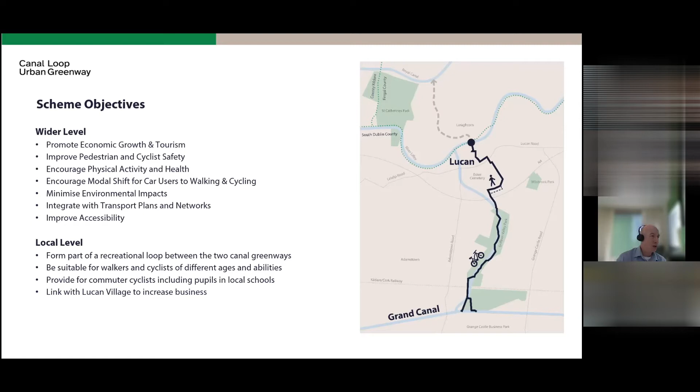And to also, that would be suitable for walkers and cyclists of different ages and abilities, to provide for commuter cyclists, including pupils in local schools, and as Rory will go into later, this route seeks to serve about 20 schools as it is emerging at the moment, and to also link with Lucan Village to increase business.

Traffic congestion in the county grew by 11% on main roads in 2016, based on annual figures taken at 13 locations within the county. Combined with population growth, traffic congestion is predicted to continue to grow. The population of South Dublin itself is predicted to grow by about 50,000 people by 2030.

Within that context, research has shown that cycling is considered to be a credible alternative to the car for short and medium length journeys. There are associated benefits identified for that in terms of reducing traffic congestion long term, reducing carbon emissions, promoting healthier lifestyles in the short term, and promoting economic benefits to local business in the short to medium term.

In terms of how the county and the area is doing in numbers of people cycling, the target is 10% for the cycle mode share under the National Cycle Policy Framework, in terms of the number of people commuting to school and work. The target is for 10% of people to cycle. To show how the county is doing, the percentage of people cycling on a regular basis in the county accounts for about 3.8% of the transport mode share.

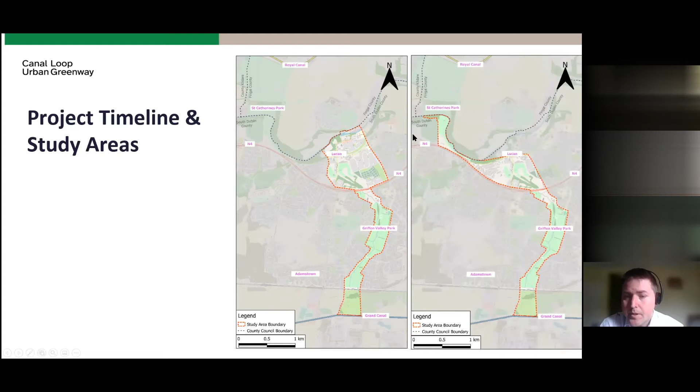Following the completion of this route selection, a second study was done to investigate options further west, which used the existing pedestrian bridge to link Lucan Demesne to St. Catherine's Park. This was known as Study Area 2. Finally, a comparison exercise was done to determine the optimum route from either of these study areas, which would best meet the scheme objectives.

In Study Area 1, there were 30 route options considered. In Study Area 2, there were a further 9.

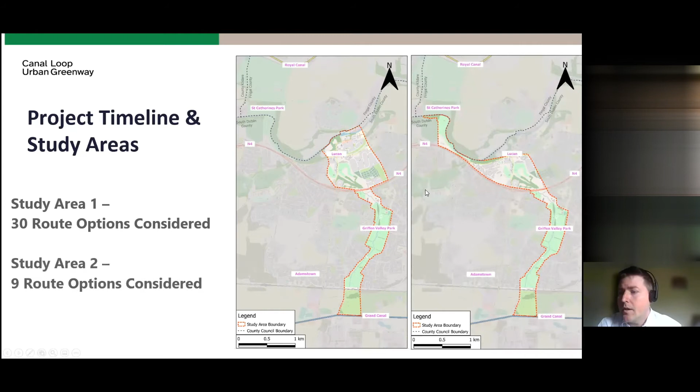So the methodology for how this was done: all possible route options within each study area were explored and concept designs were prepared for each one. The route options were then assessed against one another on the following themes: cost, and quality of service for cyclists, which was split into comfort, safety, directness, coherence, and attractiveness.

The route was designed with cyclists of all abilities in mind, so that they could be used by beginners as well as experienced cyclists.

The routes were also assessed on integration — this is integration with wider traffic plans, the walking and cycling network, any impacts on the traffic network, and on the public transport network.

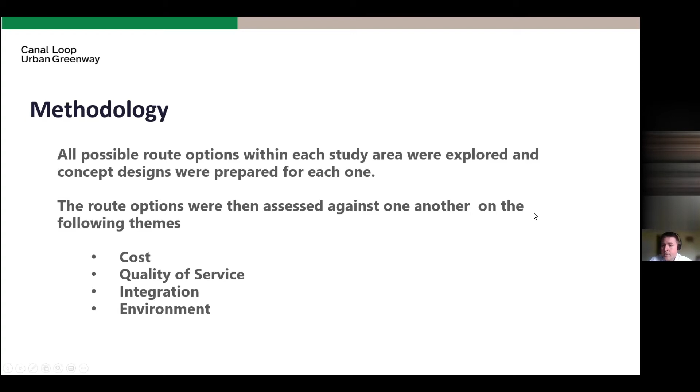They're assessed for impacts on the environment, for their viability from a planning perspective, and for tourism potential. So no route was chosen based on any one thing—it was a combination of all of these which ultimately drove the options assessment.

The design guidance and standards used for this project were the Design Manual for Urban Roads and Streets, the National Cycle Manual, the Greater Dublin Area Cycle Network Plan, and the Rural Cycleway Design. The assessment was done in accordance with the Common Appraisal Framework for Transport Projects and the Public Spending Code.

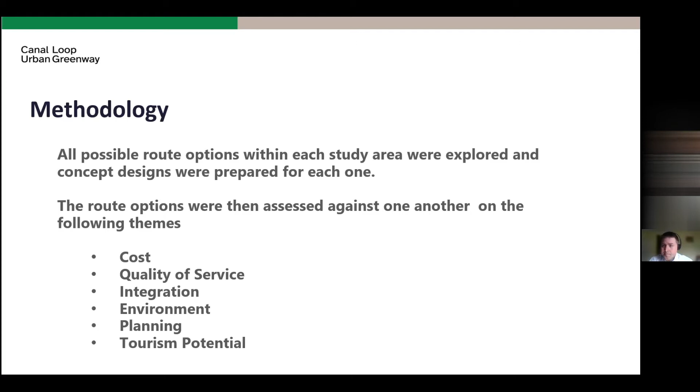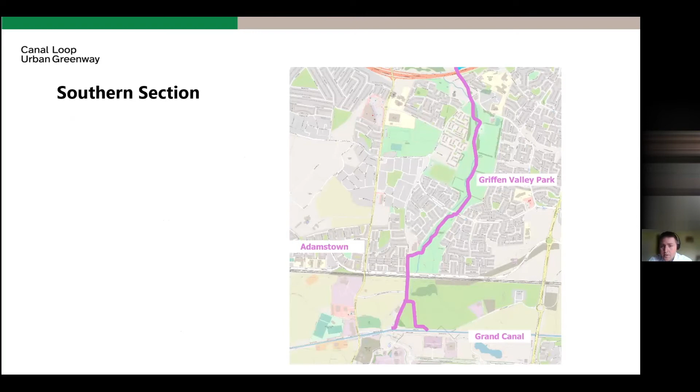The study area was split up into sections so that route selection could be done for each section separately. Here we'll look at the southern section first. The southern end of this section is at the 12th lock of the Grand Canal, and the northern end is at the existing footbridge over the N4 Lucan bypass.

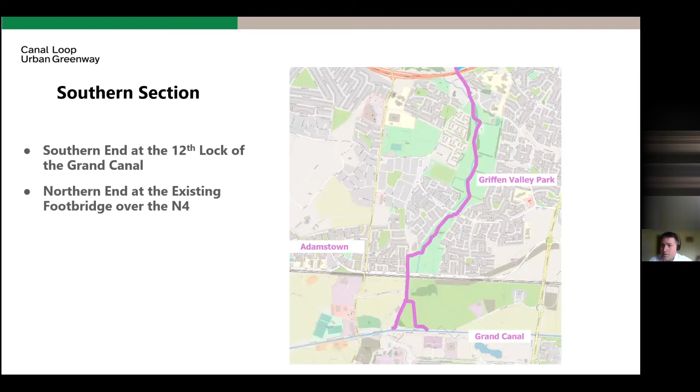This section is made up mostly of Griffen Valley Park, which runs north to south, and this section is common to both study areas—study area 1 and study area 2.

The option selection process in this section was relatively straightforward. Two options were considered, one on either side of the Griffen River.

Ultimately, the eastern side was preferred as it used the existing wider paths that already have public lighting in place. Most of the park is on this side of the river, so it will be more pleasant to cycle on and will have better connectivity to the amenities within the park.

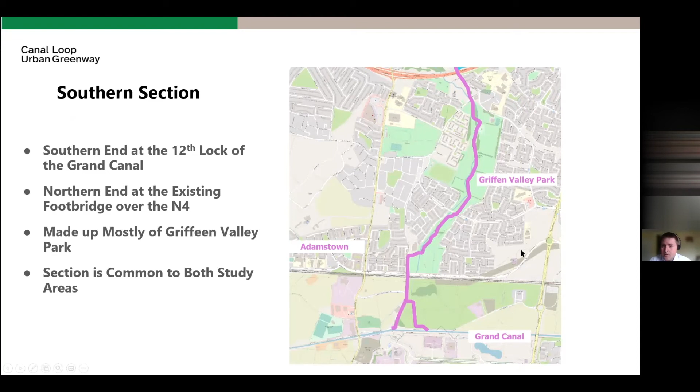These photos just show some of the existing facilities within Griffen Valley Park.

We'll move on to the northern section of the route now, for study area 1. It crosses at the same existing footbridge over the N4 Lucan bypass, and the northern end of this section is at or near the Liffey Bridge in Lucan.

It contains the Lucan village area and a network of suburban roads and streets. There are steep slopes in this section down towards the valley of the Liffey.

The route selection process in this section was considerably more difficult. There are narrow streets which make providing dedicated cycle lanes difficult, busy roads which make sharing road space with cars unsafe, steep slopes which can be unsafe going down and unpleasant going up for cyclists, and limited opportunities to cross the River Liffey.

Let's touch on that last point first, crossing the River Liffey. The design of a crossing was particularly challenging for this cycle route, and 7 bridge locations were considered during the route selection process. The suitability of each bridge option itself, as well as its ability to connect to route options further north and further south, was considered.

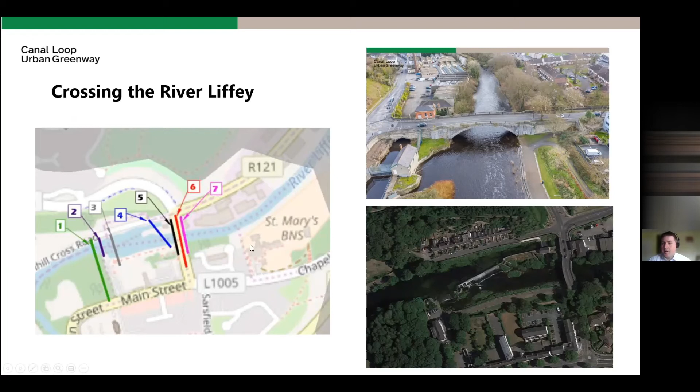The first one we'll look at is study area 1, option 1. This is ultimately the preferred route, which is the one we're proposing today.

The route goes through Cherbury Park, either Cherbury Park Avenue or Cherbury Park Road. There are 2 options presented, which we'll go into more later. Then along Beech Park, Lucan Heights, a ramp down to Sarsfield Park, and to Lucan Bridge.

All roads on this route are relatively flat with low traffic volumes and speeds. The level difference is dealt with using a new ramp that would connect Lucan Heights to Sarsfield Park. This could be at a constant gradient, keeping cyclists away from traffic on a 4-meter wide path as they ascend or descend. We'll come back to this one again later.

Study area 1, option 2 is similar to the first one, but it detours to take in Lucan Main Street and Lucan Village. Some disadvantages of this route are that cyclists would need to share road space with cars on Lucan Main Street, where speeds and volumes are above those permitted in the National Cycle Manual.

We did look at options on Main Street that would provide dedicated cycle lanes. These would involve either removing all of the parking from one side of the street or making the village one way for traffic. These were not brought forward as they were considered too impactful on the village.

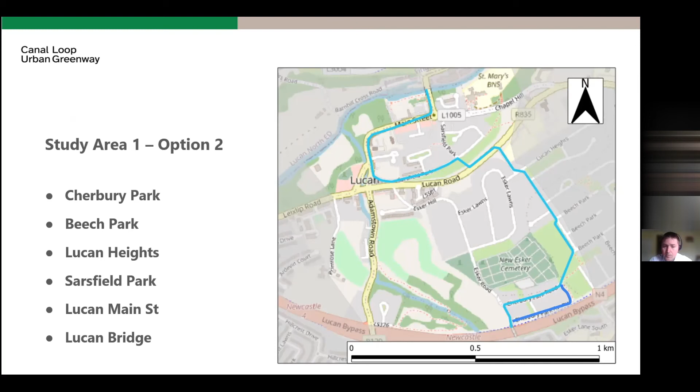Then move on to Study Area 1, Option 3, along the roads of Esker Road, Esker Hill, Lucan Main Street, and Lucan Bridge. This appears like a more direct route and wouldn't need any new structures built.

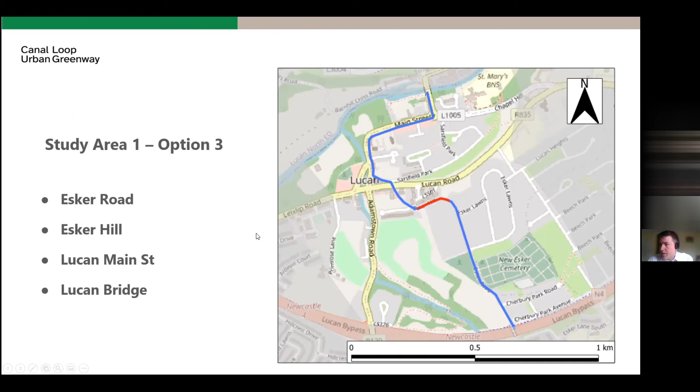This section could not be used as part of a safe cycling and walking route in its current layout. The option that was designed as a cycle route involved closing this section of road to through traffic and making it a dedicated cycling and walking link. This would mean that motorists would be required to detour via Lucan Heights.

Again, on Lucan Main Street, cyclists would share road space with cars, and it would require the reallocation of a taxi rank.

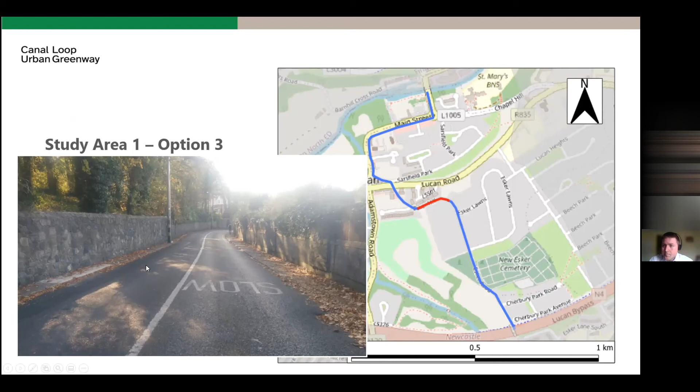Now move on to look at a couple of options from Study Area 2. Study Area 2 starts at the same place at the southern end, but the northern end is further west at the existing footbridge.

It takes in Vesey Park and Lucan Demesne, Adamstown Road, Leixlip Road, the N4, Lucan Bypass, and Ardeevin Avenue were also considered.

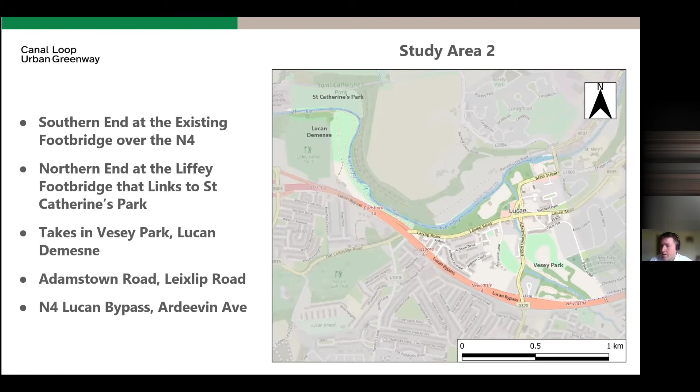Study Area 2, Option 1. This involves a new link through Vesey Park. This would involve the clearing of some woodland and a new bridge being constructed over the Griffen River. This would open up Vesey Park as a through route.

There will be a new path alongside the N4 Lucan Bypass, and there will be a new permeability link to connect through to Ardeevin Avenue. The route would then continue down Leixlip Road and into using the existing pathways in Lucan Demesne.

The link through to Ardeevin Avenue would require the use of some lands which are in private ownership and which have planning permission for the construction of a housing estate. This was considered an issue for this route. Another major disadvantage was that this route did not pass near the village of Lucan.

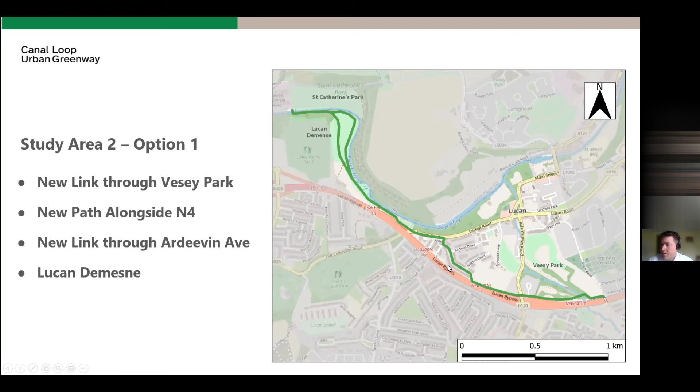This photo here shows the section alongside the N4 Lucan Bypass. And here is the junction of the Adamstown Road where the cyclists will be required to cross.

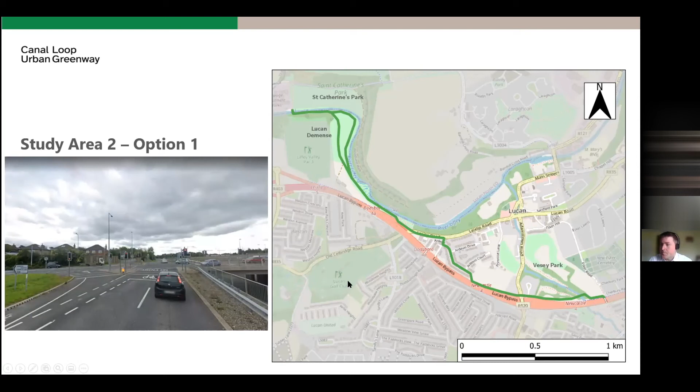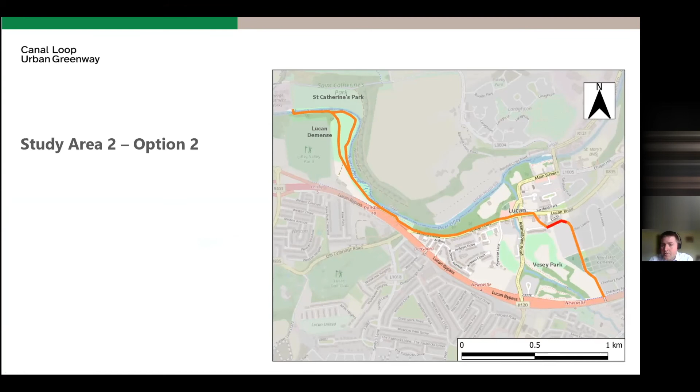The final option we'll look at is Study Area 2, Option 2. Again, the section of Esker Hill shown in red will be closed to through traffic, with motorists detouring via Lucan Heights.

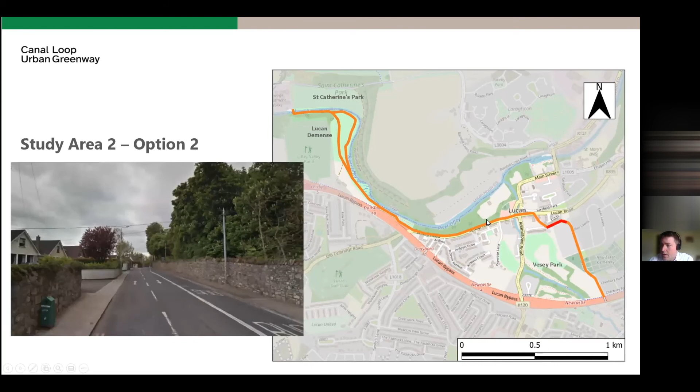This photo here shows Leixlip Road. This is a busy high-speed road where speeds and volumes of traffic are above those again where it would be permitted to mix cyclists with traffic.

So on this option, the left-hand lane will be converted to a two-way cycle track and the bus lane would be removed. To compensate for the loss of bus priority, Leixlip Road will be made one way only during the AM peak.

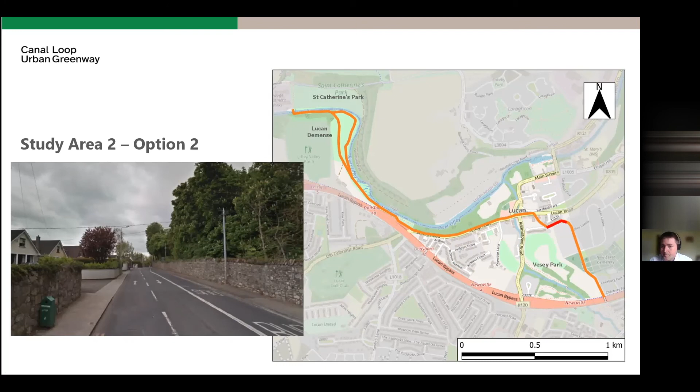I'll just move on to discuss the emerging preferred route now in a little more detail.

The existing paths through the southern side of Griffen Valley Park, part of the previously built Griffen Valley Greenway, will be used. The paths on the northern side of the park would be upgraded to a similar standard. The existing footbridges over the railway line and the N4 would be used. There will be new toucan crossings through signalized crossings, allowing cyclists and pedestrians to cross all roads that bisect the park. The existing kissing gates would be upgraded and replaced with more cycle-friendly gates, allowing cyclists to go through without having to get off their bikes.

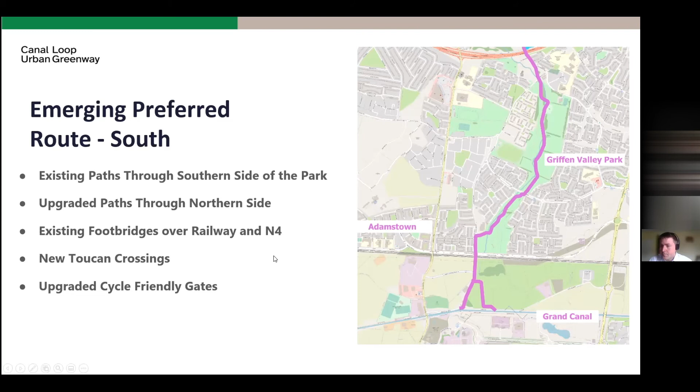Let's go through the emerging preferred route in the northern section now. The small arrows appearing here will show you where these photos were taken. The first photo shows the section on Cherbury Park Road, one of two options presented in this section, which will be discussed further in the breakout rooms later.

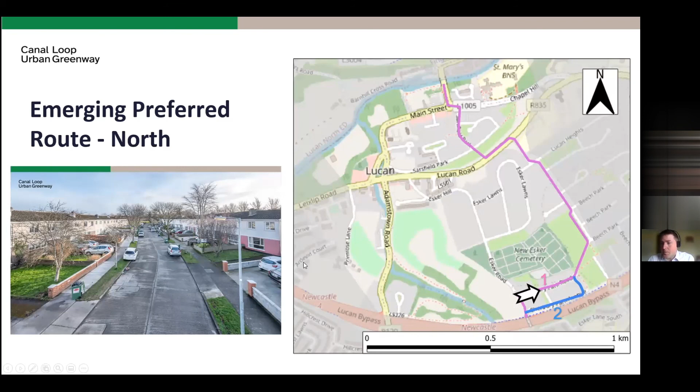On option 1, cyclists would share road space with traffic. There would be limited changes: cycle symbols sprayed on the road and directional signage to allow cyclists to find their way along this route.

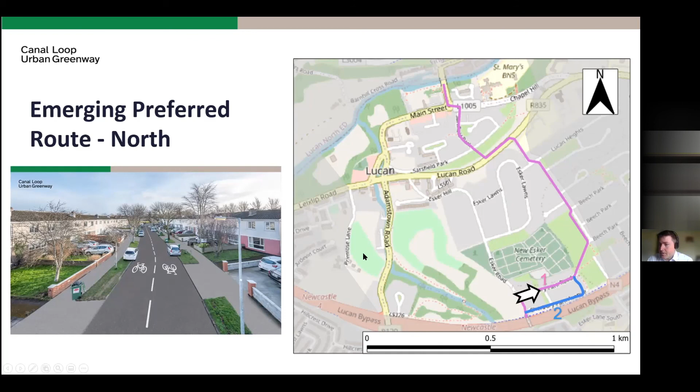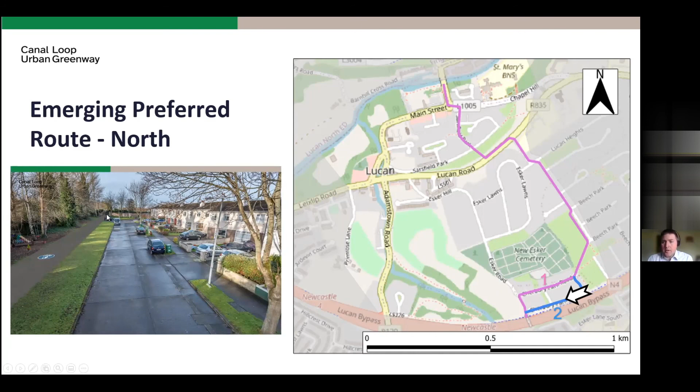The second photo is taken on Cherbury Park Avenue. On this option, a new track will be built through the green area, and a new permeability link to open up the end of the estate will be constructed.

Cyclists would then use the existing paths to link over to Beech Park and then travel alongside the existing playing fields. Once past the playing fields, they would move on road and share road space with traffic.

There'd be some raised treatments at junctions, and the junction between Beech Park and Lucan Heights would be realigned so that cyclists traveling this way would not need to make a left and a right turn. This would just be a straight through movement for them.

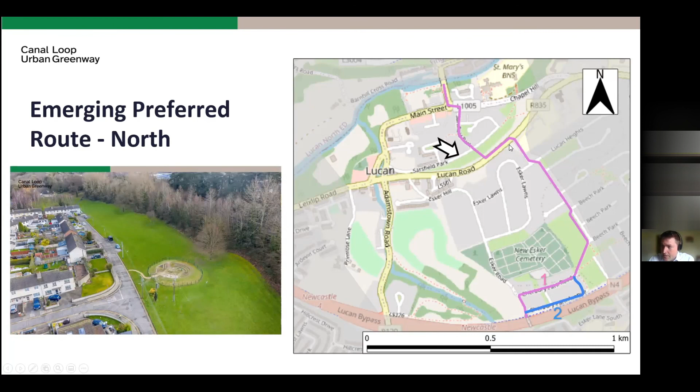A new ramp would be constructed to link the Lucan Road down to Sarsfield Park. There's a basic visualization of what it could look like. This ramp will be the subject of the workshops as well.

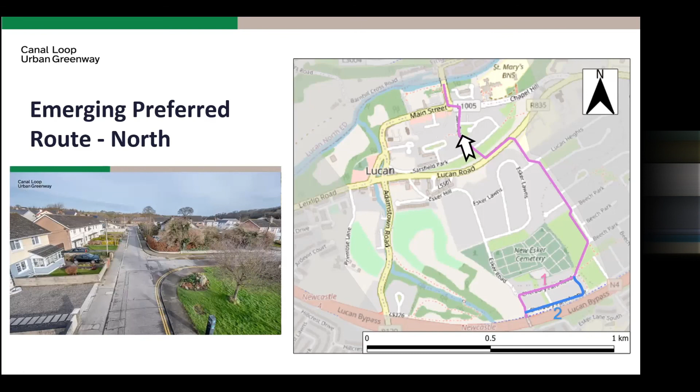Cyclists would then proceed down Sarsfield Park, where again they would share road space with general traffic, with just directional signage and cycle symbols on the road.

Cyclists would then come into the roundabout at Lucan Village. This is a busy roundabout, and on this design, cyclists would proceed around the outside of the roundabout using new pedestrian crossings. This would allow less confident cyclists to stay away from the busy roundabout, then proceed along the western side to reach the Lucan Bridge.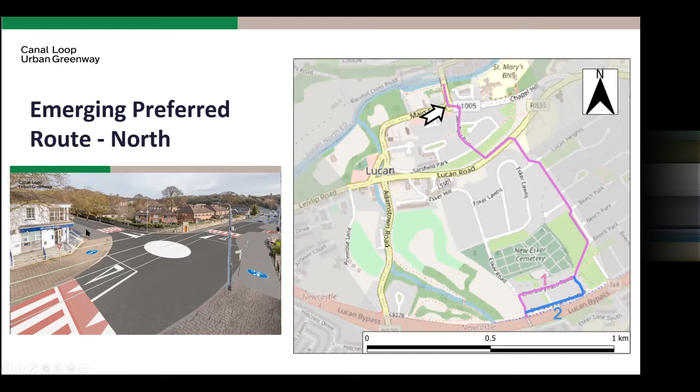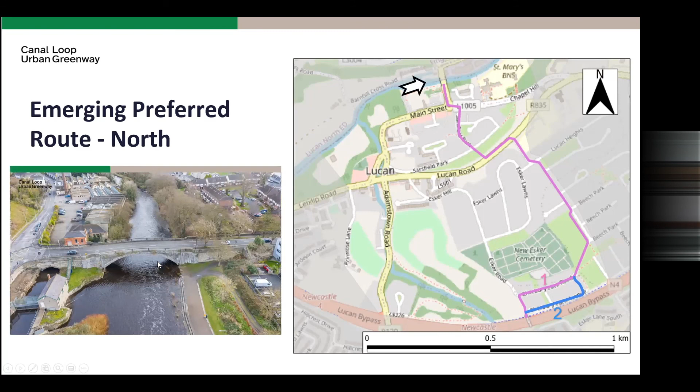This will avoid works on the protected structure and will allow pedestrians to get views of the old bridge from the new one. The footpaths on the existing bridge are very narrow, and this new bridge will provide a much higher level of service for pedestrians as well as cyclists, particularly for those in wheelchairs and those with prams.

The scheme benefits: along with the completion of the Royal Canal Greenway, the Grand Canal Greenway, and a section within Fingal County, this will contribute to the completion of a 40-kilometre recreational loop, which could be reached from basically anywhere in Dublin.

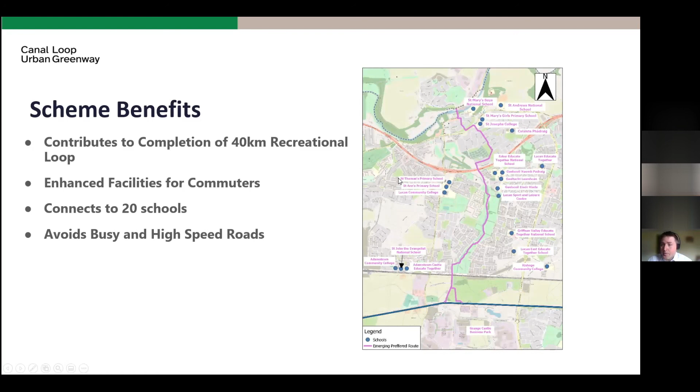It would provide enhanced facilities for commuters. It will connect to 20 schools, as shown in the image. This route avoids busy and high-speed roads, and avoids steep and narrow roads. It would have health benefits for users and would contribute to a reduction in traffic pollution and CO2 emissions.

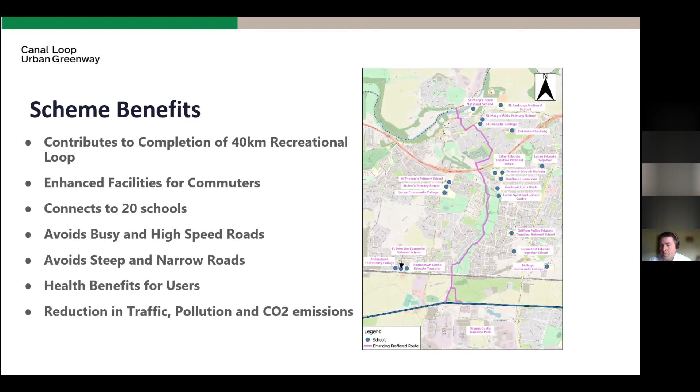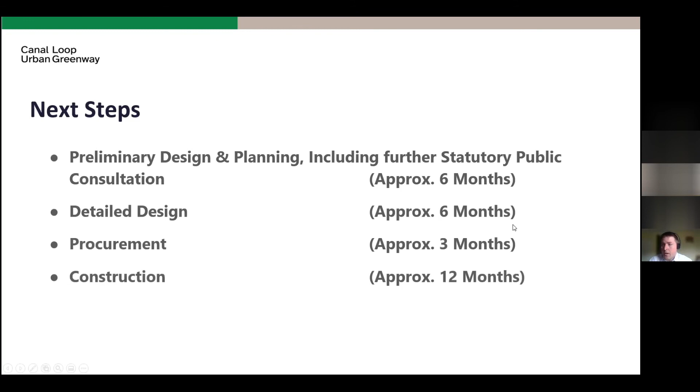The next steps: following this consultation, there'll be a preliminary design and planning stage, which would include further statutory public consultation, taking approximately 6 months. If successfully granted planning, there'd be a detailed design stage taking approximately 6 months, then procurement of a contractor, and a construction stage, which would take approximately 12 months.